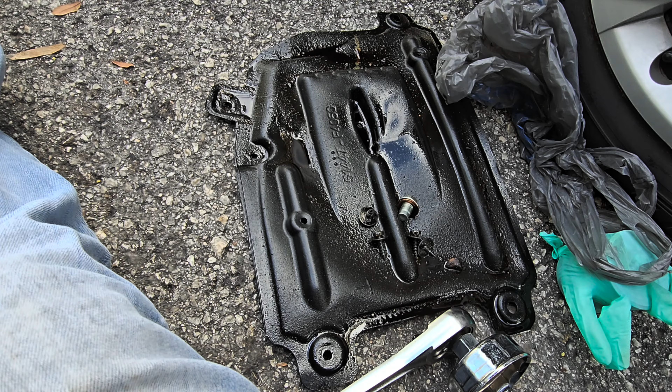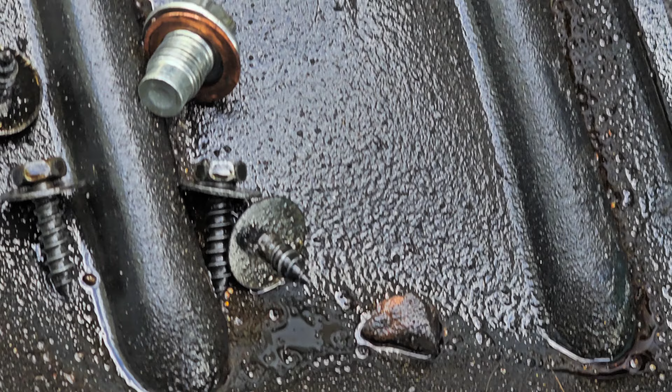So I am doing the oil change for the car, and this is what I found. The car has been leaking a bit of oil because of the washer that I didn't change. This is how you see how important it is to replace the washer on the bolt for the C-HR oil pan.

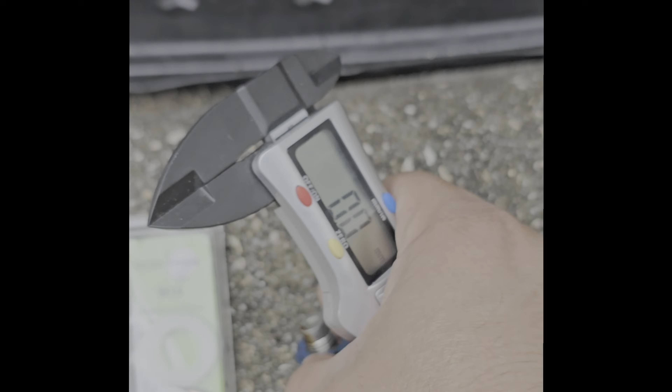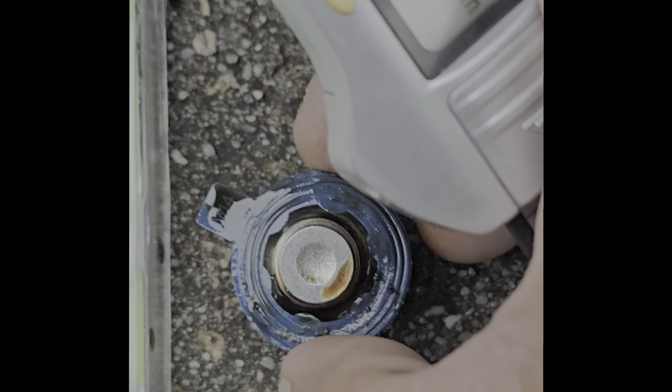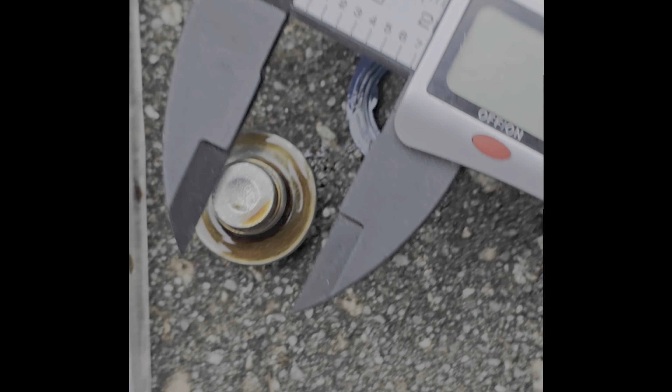The reason it looks that bad is because I didn't have a washer, so instead I used a washer that was bigger than the one it was supposed to have. This one is for a size M14, and the one the car requires for this is at least an M12 for washers. That is why. But I knew that, and I was able to order the M12 washers online.

And this is where I'm going to show you what not to do and what can happen, and also to show you the size of the washers we have to use for the C-HR.

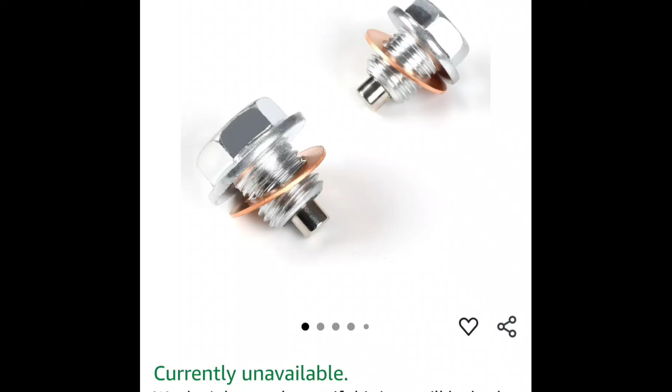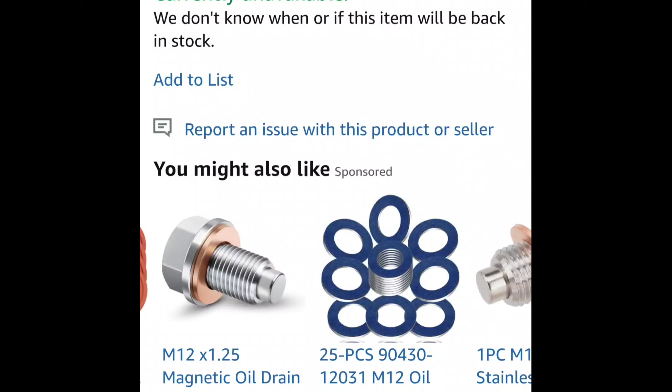This is one of the oil pan drain plugs that I bought, and it turned out to be pretty good. It shows two here on the image, but they only send you one. Right now it says currently unavailable, but they're all over.

Now you need to see the difference on something. You see this one is short, and it has a magnet right here. Now what I found out is that magnet doesn't do much. Last time I did the oil change, it didn't show like it was dirty or picking up anything, so that didn't make much of a difference. And what I didn't like much was that the distance from here to here was too short. That's what I learned about that one.

These are the washers that I bought, and I really like them a lot. They are really good, and they come inside one package. And they worked out pretty well.

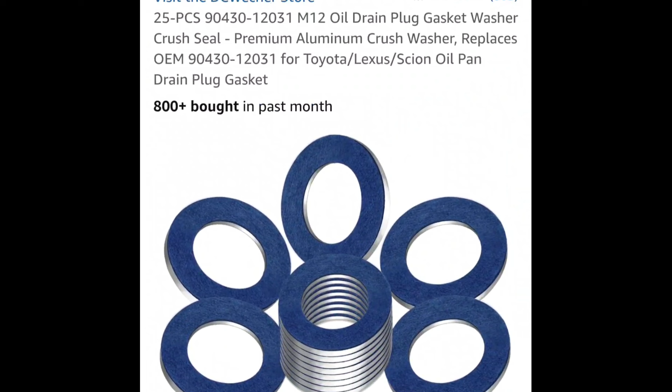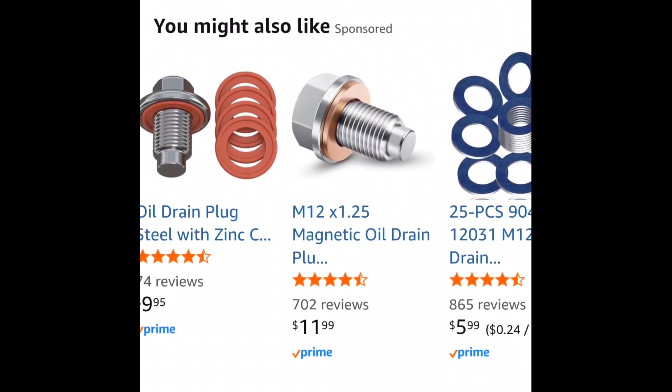So going back to the bolts, you can see here different sizes. Remember to stay on the M12 times 1.25. That's the size, at least for the CHR I have.

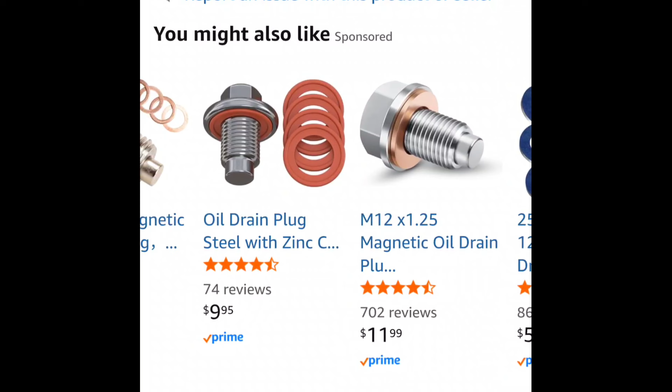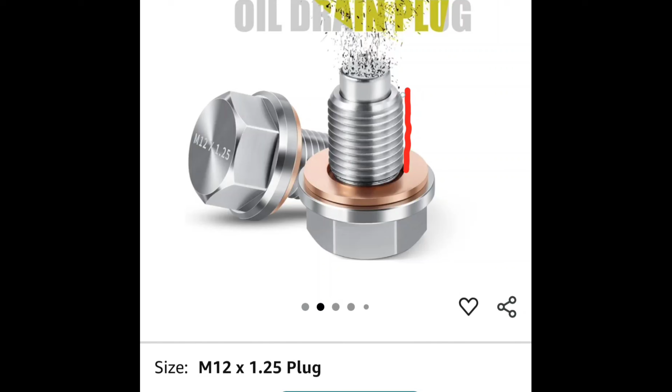You see this one, it's longer, the distance from here to here, than the other one that I showed you. Like I'm telling you, this didn't make much of a difference. Another thing I like is that they also sell it in different colors. That's a nice option.

The copper washers for the CHR, they don't work that well, because one of the things you don't want to do with the CHR oil plug is tighten it up too much. Copper washers require you to tighten them up a little bit more than what you would do with the other ones that I showed you.

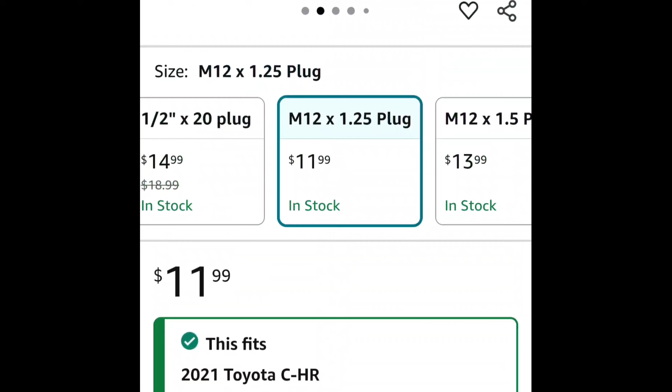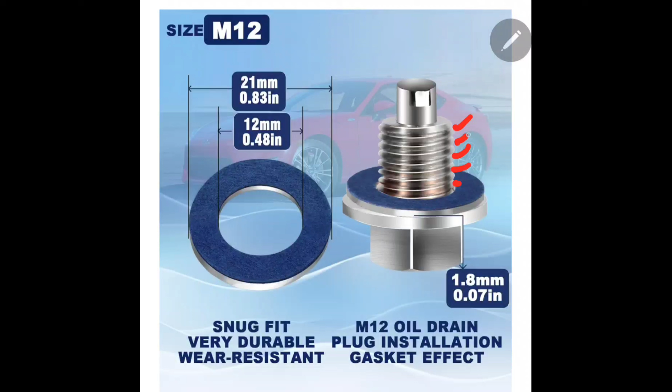This one. These ones are different because they have that blue thing on it. That helps it seal more without putting much pressure or too much torque on these threads, because one thing I've noticed is that the oil pan threads were wearing out and becoming weak. So I don't want to keep messing them up and grinding them. So what I want on my bolt is more thread and a soft seal. I want more thread because I want to get more grip from the oil pan threads.

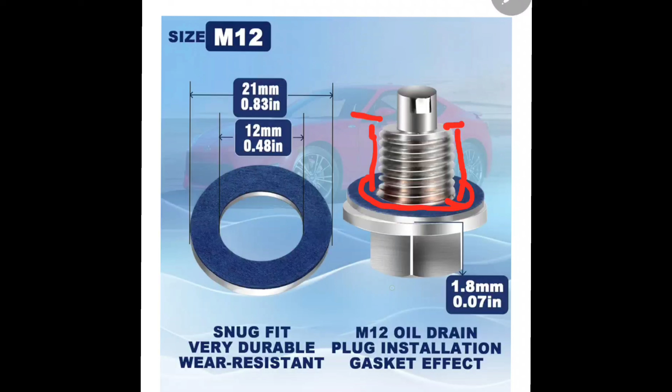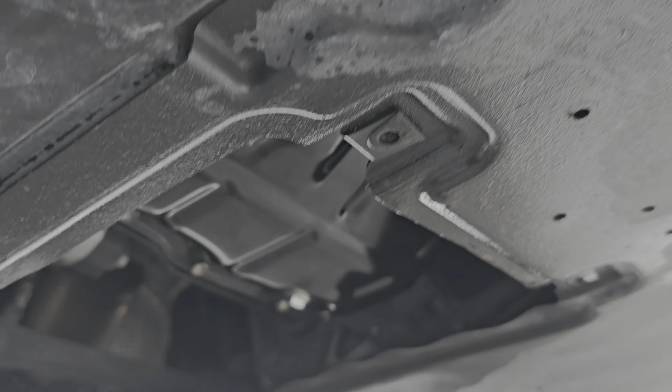Now in this part, I thought that the copper washer I put was gonna stop the leak, but I see that it didn't. It was leaking all over and it didn't work that well. Maybe because I didn't put that much pressure when I was tightening it up. But the thing is that you cannot over tighten this drain plug. If not, you're gonna mess up the threads, and that is really going to mess things up.

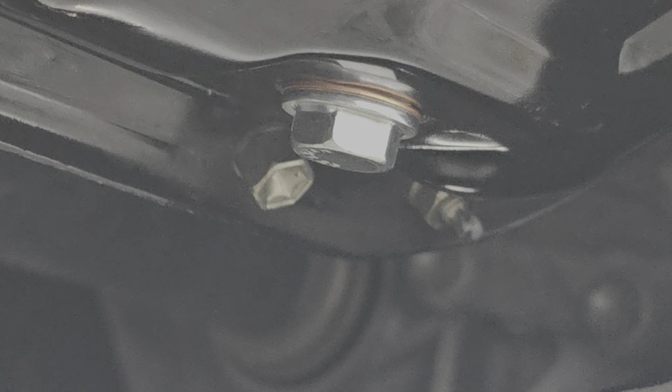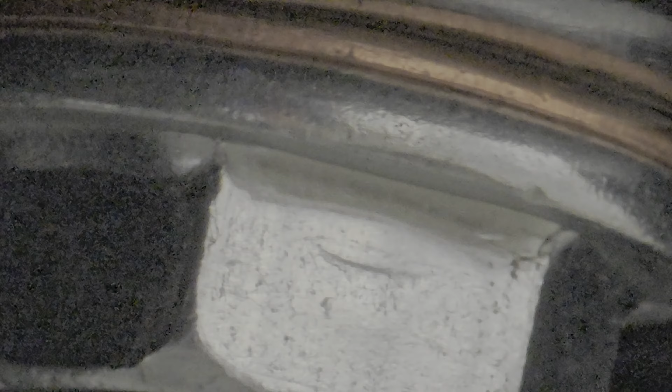Here you can see the drain plug, the new one with the copper washer on it. And it looks great, I mean, it's working. It just didn't stop the leak the way I wanted. Like I say, probably because I didn't put that much pressure on it, because I don't want to over tighten. And there was probably an opening around it, and that's what caused it to start leaking more.

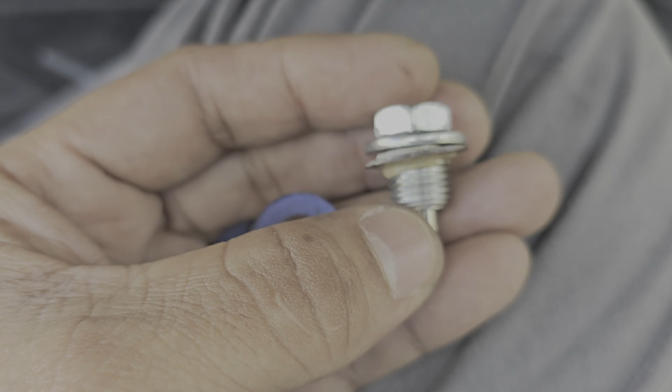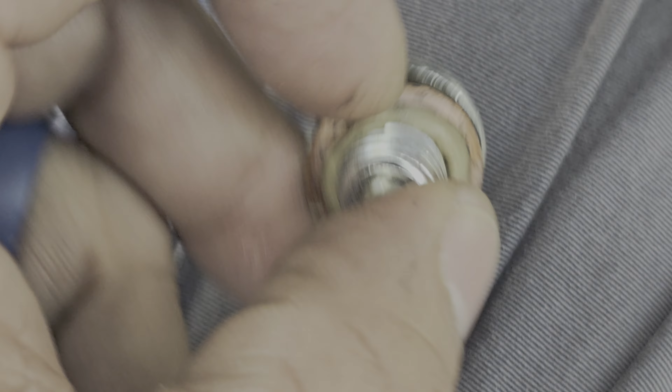So what happened was that since I was ordering the other washer, I didn't have nothing, so I ended up putting a bit of silicone on that same copper washer. At this time here, I'm just replacing the washer, but I'm still using the same drain plug. You see here, this is the new one I was showing you that I bought, but just the washer didn't work out like I wanted. So I'm just going to replace the washer but keep the same bolt, because that drain plug has the threads.

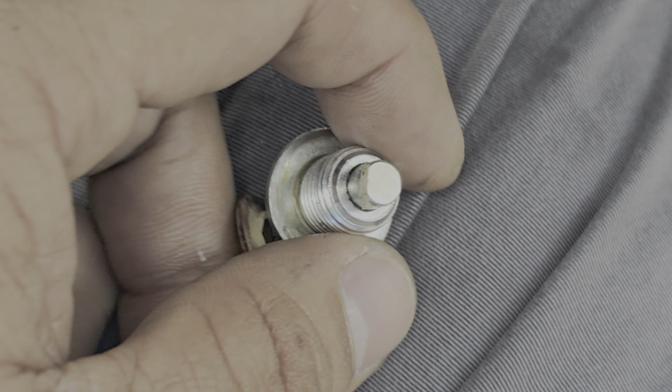They are better than the one that the car came with. It just needs a new washer, and I think this one is gonna work out better because with this washer I don't have to put that much pressure when tightening it up. And if you see here, it has two sides, one side is thicker than the other one. At the end, I don't know which one it is, so I'm just gonna go by my instinct and just let it sit.

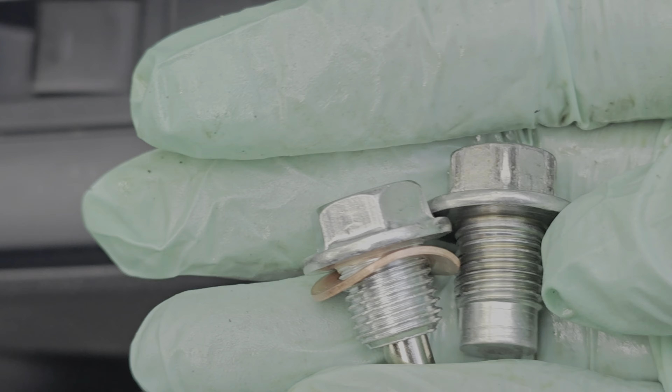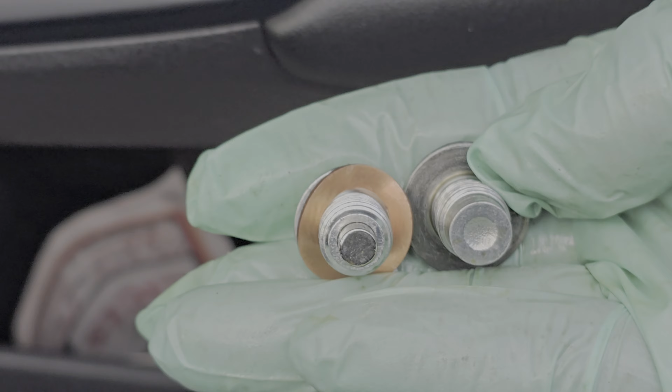Now this is another thing I wanted to show you. The drain plug on the right is the original from the car, and the drain plug on the left is the one that I bought new. The one on the right, the original, is a bit longer than the other one, and I think it's a bit thicker also. But in this case, it doesn't matter much because the old drain plug has the threads a bit gone already, and that is why you probably need to replace your drain plug.

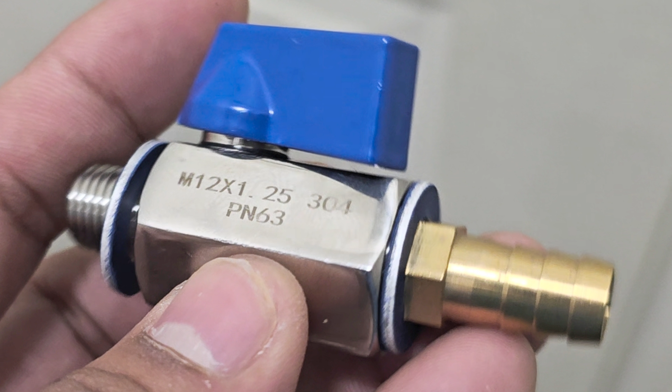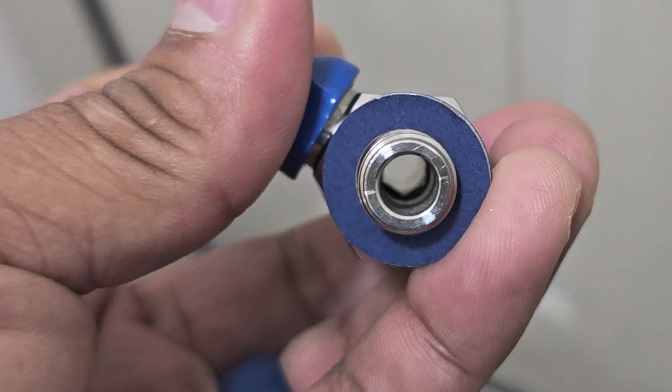Here I'm showing you a part that you should not buy for the CHR because it's not going to work on it. So I bought this one thinking that I was gonna be able to put a valve on it so I could just open the valve and close it every time I replace the oil. I'm like, this is gonna work out great, let me order one of this. I'll just open the valve, drain the oil.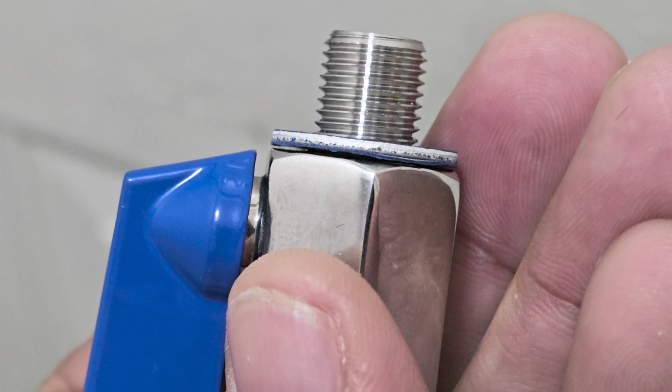But yeah, it didn't end up working out.

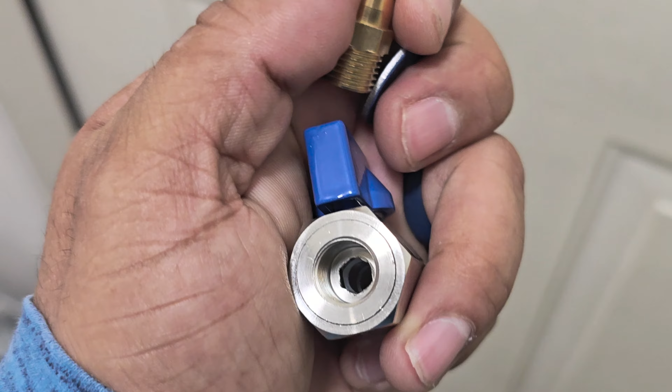I also had one of these. That's where I was gonna connect the hose when I was gonna do the oil changes. You see, with this, you just open it and close it, and that's how you do your oil changes faster, and you don't have to be removing any plugs at all. That was the purpose. Now this is the right size. This is an M12, and I had the new washers on it.

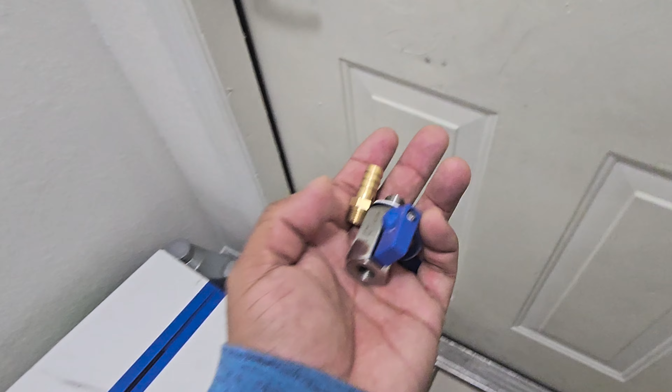But when I came and started thinking about how I was going to install this, that's when I realized, yeah, it's not gonna work out for the C-HR, because once I take this out, you see, this one has the new washer and it's not leaking, nothing.

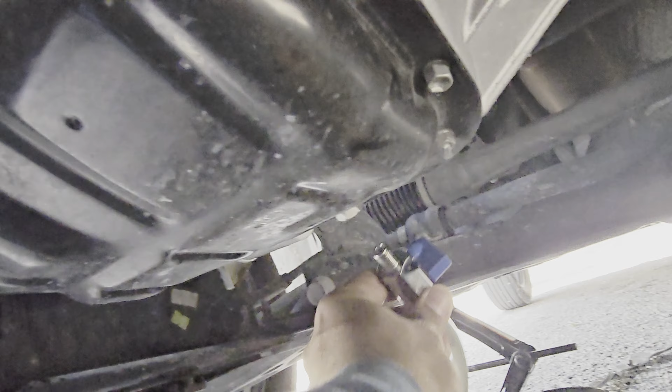You see, one of the things I wanted to do here is install this thing right here. I wanted to put a valve on it. But the problem is that I have that wall on the back. So if this goes inside, as I turn to try to tighten it up, it's gonna hit that.

Just to get an idea, so I can't use it. I really wanted to use a valve system, but yeah, it's not gonna happen. In case somebody thinks about doing this, it's not gonna happen like this. If this valve was on this side, that would probably work. I can turn it and tighten it up, but just like this, it's not gonna work out.

So yep, I wanted to connect it with a hose so it'll be easier for my oil changes. Now, another thing I noticed is that it was gonna stick out too much, and you don't want it sticking out too much either. So that is something to be concerned about. The position is just not too great, because if you hit a bump on the floor or something, it's probably gonna break it off, and you don't really want to risk things like that.

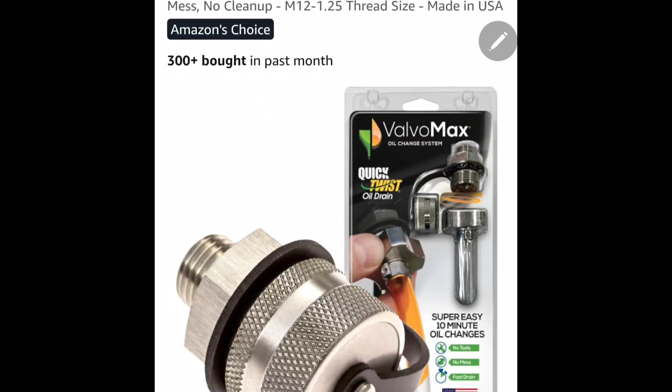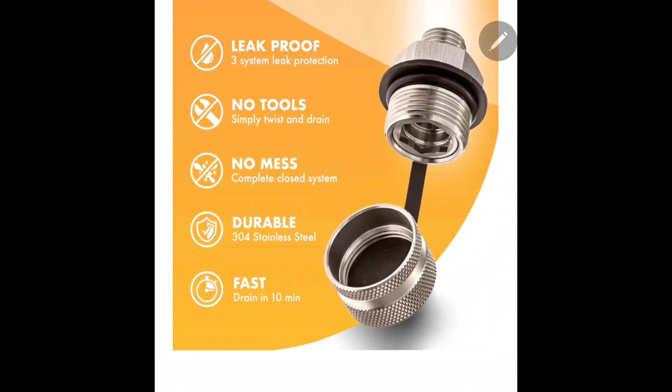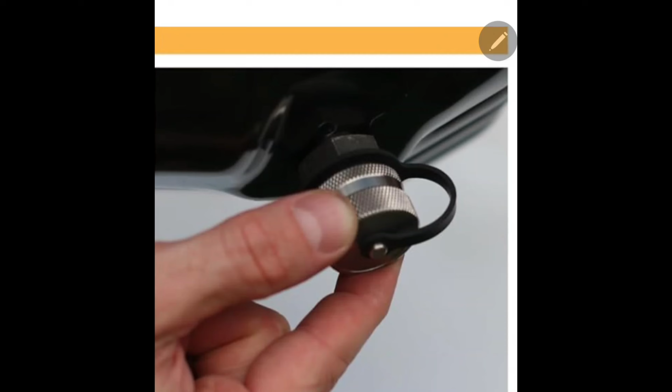The cheapest alternative I found was this one, and yeah, it's super expensive, $50, but I think this one will definitely work, because it's smaller, it's not sticking out too much, and it's just like a plug. So I think this will work out better, and as soon as I get some money, I'll probably buy it.

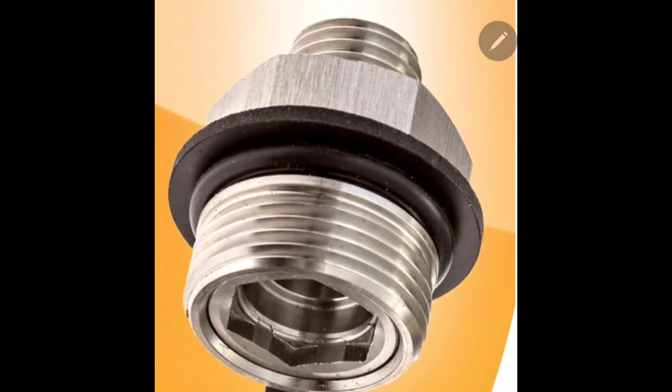Another thing is that once I put this on, I'm planning on putting a bit of silicone on these threads, the high temperature silicone that you put on gaskets. I'm planning on putting it there when I put this on. That way it's gonna stay sealed.

At least I know I'm not gonna have problems for the next 2 years before I plan on taking it off again. But I know I'm gonna be good for at least 2 years, and I don't want those threads to keep wearing out as I keep making oil changes, because I make oil changes almost every month or every 2 months.

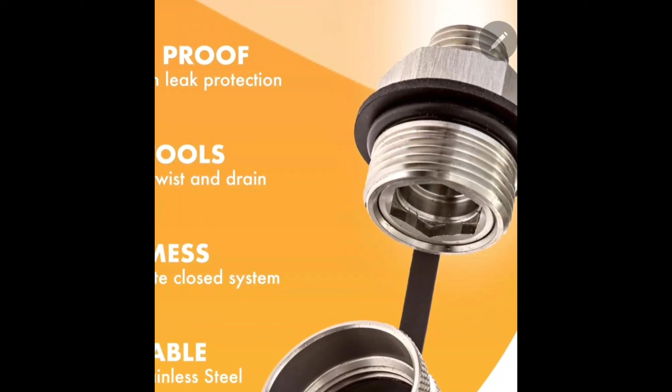And then I'll just close it. And you always gotta make sure you go to Harbor Freight or somewhere where you could get lots of these O-rings, and that will be the only thing you'll be replacing on this.

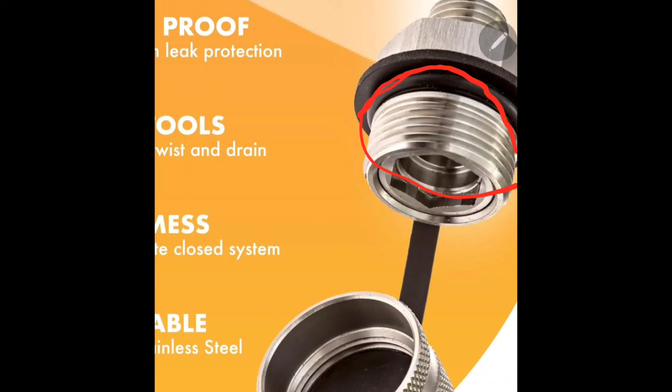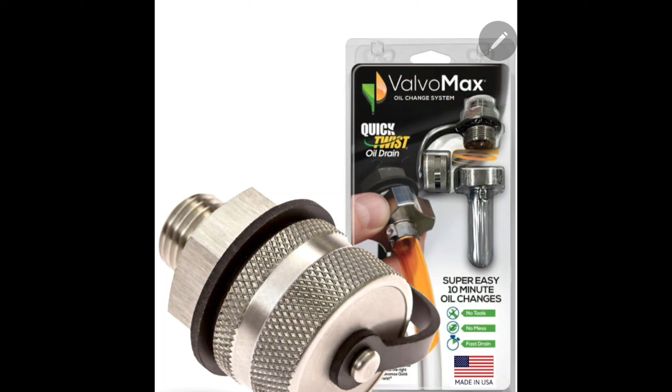So this is definitely a great tool to have for the C-HR, a great part to have for the C-HR. It works awesome. It's easier.

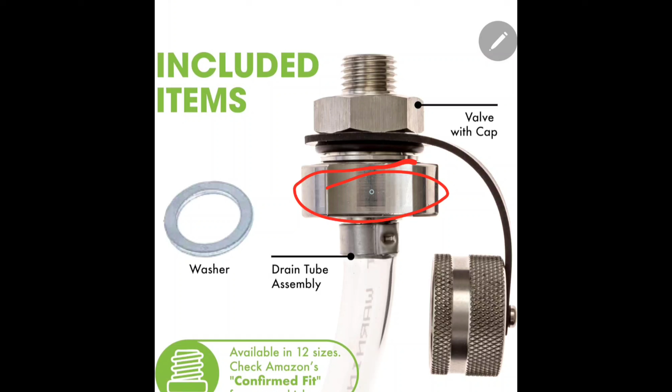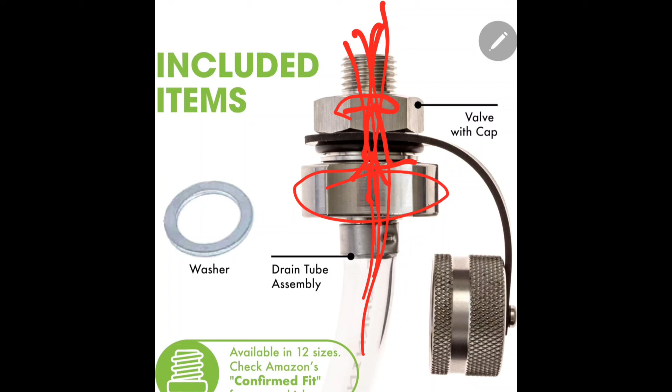You see, it includes this part that you screw in, and that's what pushes the valve more inside. It opens it so oil can come out. And once you unscrew this out, it shuts the valve off inside. And then you just put this cap back on, and you should be good to go.

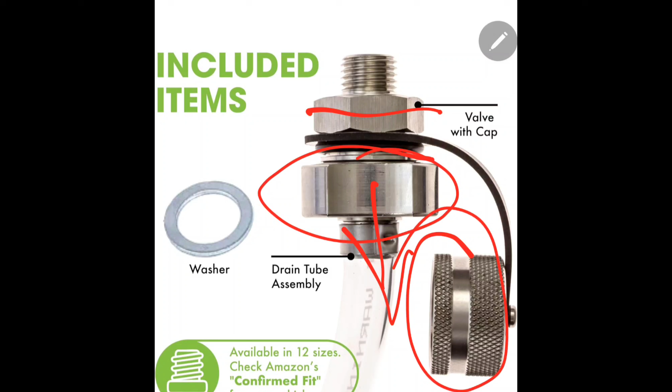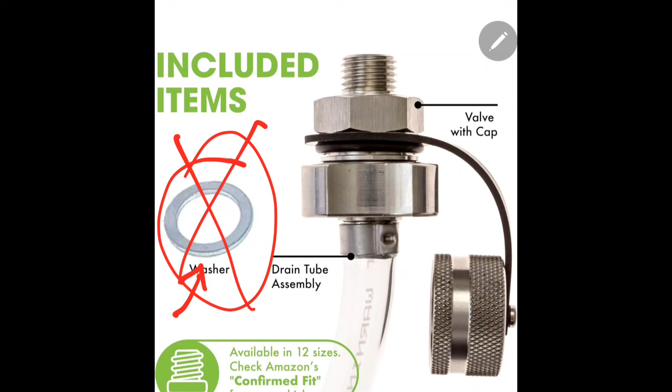Now you see, this one also comes with this washer. Now I don't trust these washers too much though, even though this aluminum I think is softer than the one that was copper. But I think I'm gonna keep using the washers that I have.

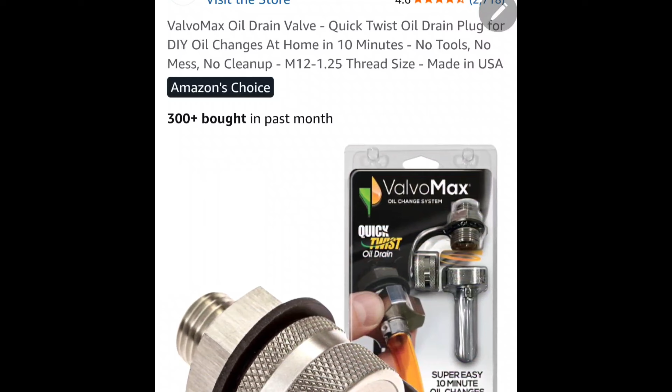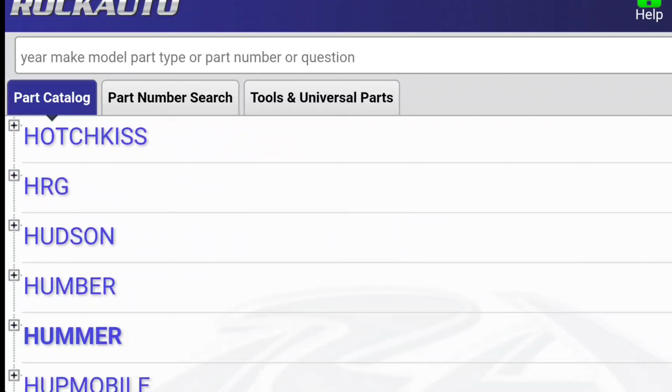And that is it. This is another great website where you can order parts for the C-HR. I think I found the drain plug here, and they have a whole bunch of other parts.

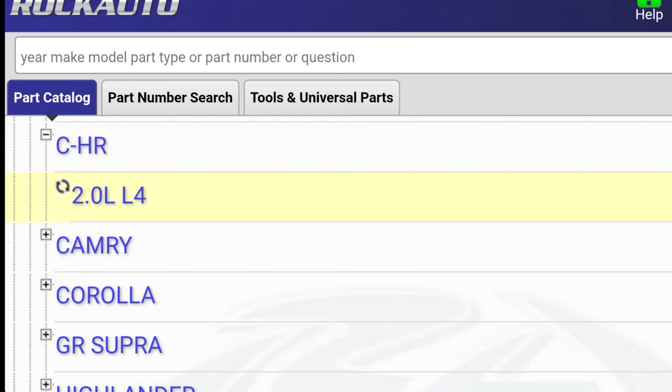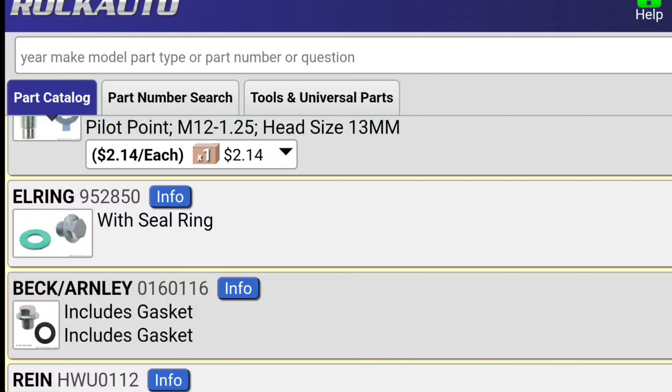And you see here, they have oil drain plugs. Now, be careful when you order here. You really gotta be careful when ordering, because it has parts for the Japan model and the regular, but I don't think there's much of a difference on the drain plug. Just stay on the right measurements.

You see, this one says M12, 1.25, and it's also telling you the head size is 13 millimeter. The head size will be this size right here.

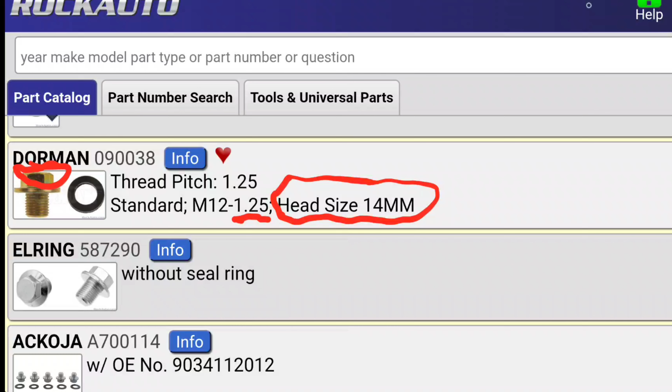So this one says it doesn't have the seal ring. I think it's without the washer, but the prices are not bad.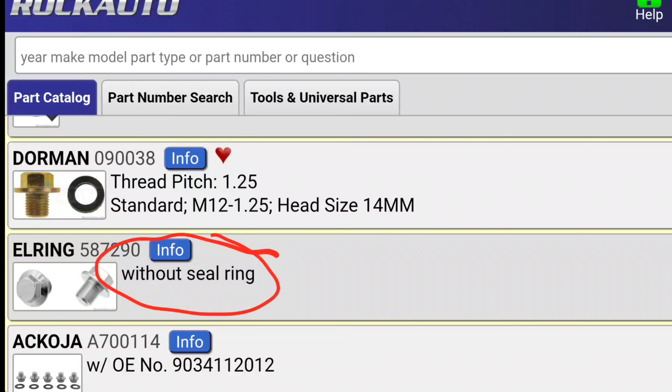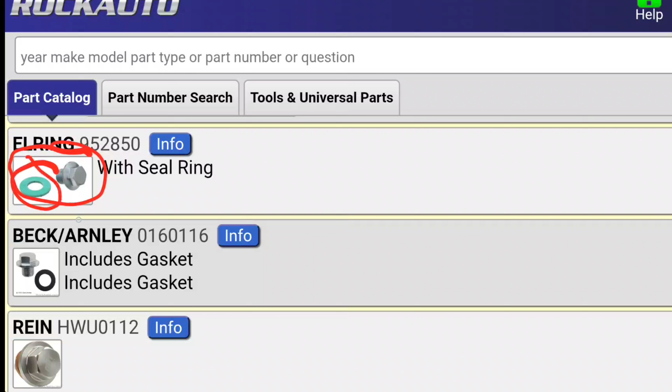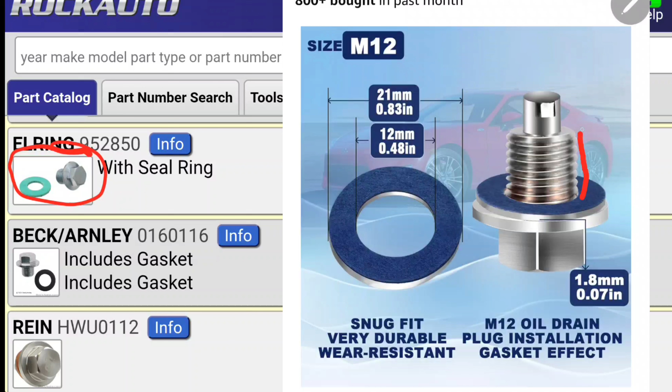This one looks like it's long. You see, this one has a rubber, probably a rubber seal. That one is not bad either. I think it worked out pretty good, but I prefer the ones that I got with the blue seal on them. The ones that I got, they're aluminum, but they have like this blue seal around it that makes it better. And that's for the CHR right there.